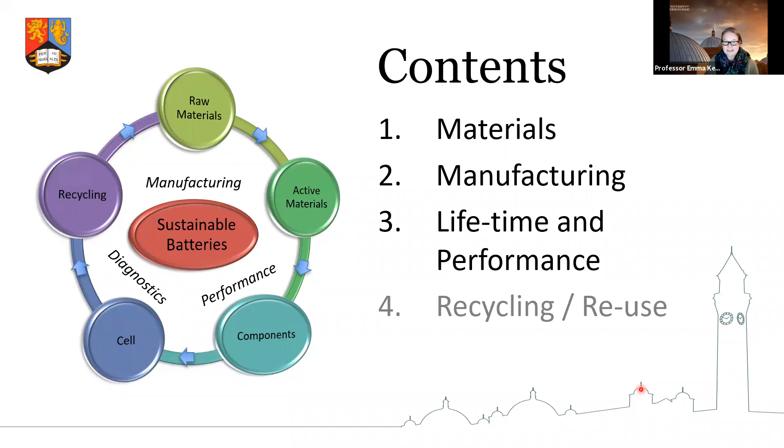And this is something that I'd like to talk to you about a little bit today in a bit of a question of sodium versus lithium. And if I get time, I'll talk about the recycling at the end. So cost and sustainability are really key for battery technologies.

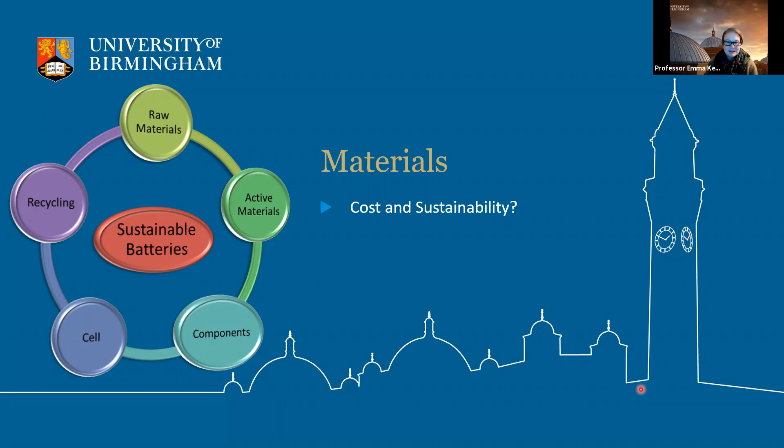And if we look at the critical materials list, this is a recent report from 2020 with an updated list of materials that are strategic or critical. And what we have here is a kind of a map of these materials with the supply risk on the left-hand side here. And at the bottom, you've got economic importance. So even if there's not a particular high supply risk, for example, you can still have a strategically important material, which is still on the critical material list.

So an example of that is this phosphate rock here. Phosphates are used very heavily in fertilizers, and so they're of extreme economic importance and just make it into the red blobs, which are the critical raw material list for 2020. If we look at this a little bit further, we can see several materials within this section that are used for lithium-ion batteries. Now, I've highlighted the phosphate, which is used in lithium iron phosphate.

Cobalt here, which has been on the critical materials list for some time. This is of strategic importance, not just for batteries, but for stainless steel as well. And there is a supply risk for this material because of where it's geographically located. The majority of the cobalt is still mined from the Democratic Republic of Congo. And so we really need to consider how we can recycle or reclaim cobalt from end of life, whether that be steel or from batteries, to be able to reuse it in the battery space.

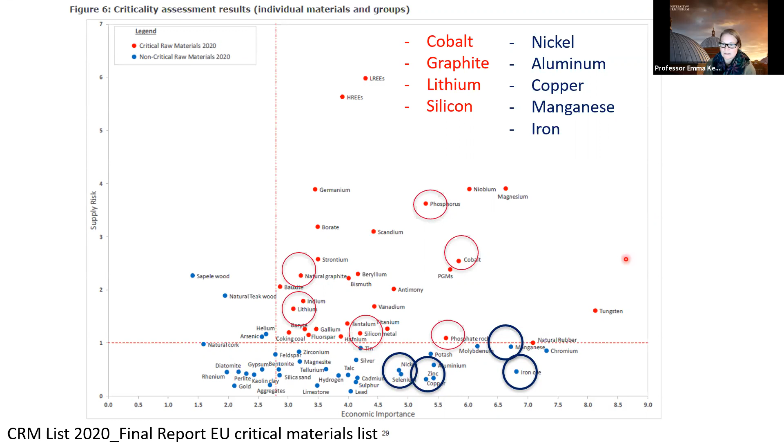So if we consider the lithium versus sodium question, whether we can substitute, for example, sodium type materials for the lithium before we consider recycling. If you look at the left-hand side, we've got some very beautiful pictures here of lithium flats and lithium mining in various parts of the world.

The abundance of lithium in the crust is 16 parts per million, and currently the recycling rate is less than 10%. The main producers are Australia, Chile, and China. Australia is mainly from rock, such as spodumene, and China, Bolivia, and Chile have large salt plains

which you can mine the lithium from. So essentially they dissolve up the lithium chloride that's beneath the ground and bring it back up to the ground and then evaporate the water off, and you end up with these little piles of salts that can then be transformed into other materials.

Interestingly, sodium is extremely abundant. I think it's the 6th most abundant material in the Earth's crust at 23,600 parts per million. It's generally not recycled because it is so abundant and quite easy to get a hold of. The main producers, again, are China, US and India. And these are some pictures here.

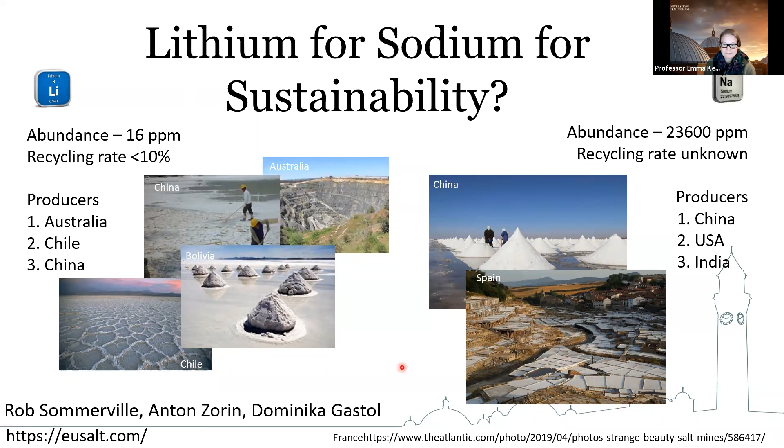So if we look at how sodium carbonate is made, which is the main material that we use for manufacturing of other types of materials, then I mentioned the solar evaporation, which is used quite heavily in Southern Europe, for example, where the water is evaporated off highly concentrated salt and you're left with these little piles of sodium chloride.

We also have rock salt, and Cheshire in the UK for many years had big rock salt mining caverns up there in the northwest. They're actually now used for storage of documents, because large salt mines keep away the moisture very well. And you can also do the similar solution mining. What I've done here is just given you an idea of the different types of mining that are done in Europe for sodium chloride.

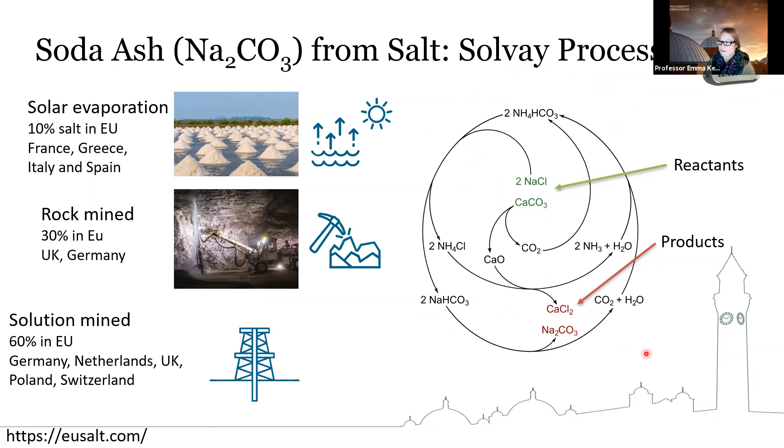Now, sodium carbonate is relatively easy to make. What you do is you add some ammonium carbonate materials and calcium carbonate, and you can form calcium chloride and sodium carbonate from this. It's called the Solvay process, and this process is still used today for the production of sodium carbonate.

Now, interestingly, lithium carbonate is also made in a similar way. So we can find these lithium chloride little piles which are created from evaporating off water from super concentrated lithium chloride pans. Now, this can take quite a long time, up to about 15 months. What then happens is we can actually form the lithium carbonate.

The interesting thing for me when I was looking into the mining and the mineral extraction was that sodium carbonate is actually used in the manufacture of lithium carbonate, and then produces sodium chloride. So here the lithium chloride is mixed, it changes the pH, you add in the sodium carbonate and the lithium carbonate drops out of solution.

On the other hand, lithium can also be mined from rock, and one of the main sources of lithium, for example, from Australia, is a rock called spodumene. This rock is first heated to form a beta spodumene, and then the lithium leached out of the rock. And again, interestingly, sodium carbonate is again used in the formation of the lithium carbonate within this system as well.

And this here just gives you a little schematic of the lithium being exchanged in the process. So it's leached out of the rock to form the lithium sulfate, which then reacts with the sodium carbonate. There are other sources of lithium, and people are now looking at mining from clay, for example.

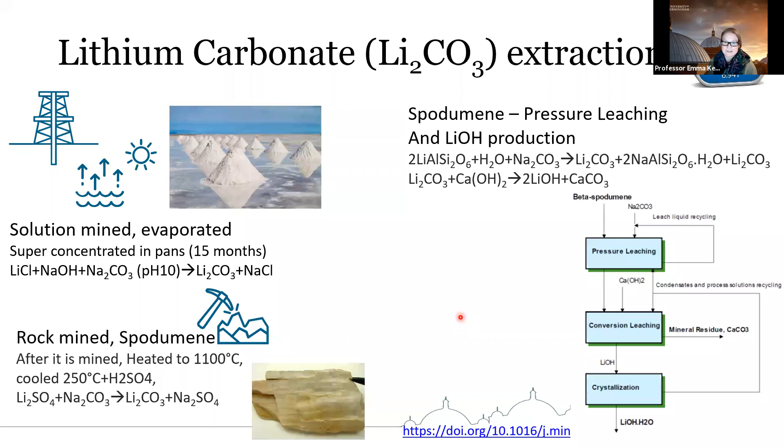In this particular route, lithium is leached again from beta spodumene, but under a hydrothermal process. It's then reacted with calcium hydroxide or lime to produce the lithium hydroxide, which is what we use for manufacturing of materials for lithium-ion cathodes in particular.

So if we compare the components of the two different types of batteries, this is just an example of the battery. We have an anode, a cathode, and an electrolyte. And the anode is on a current collector, and the cathode is on a current collector. In a lithium-ion battery, the anode is on copper, typically. The anode is typically made of graphite as well, sometimes with silicon or silicon oxide in as well. And the cathode current collector is an aluminium.

Now, in sodium-ion, you could use copper and aluminium, but for cost reasons and for safety reasons, aluminium can actually be used as the current collector. And this is because in lithium-ion, lithium actually intercalates into aluminium about 0.3 volts versus lithium, whereas sodium doesn't, so aluminium can be used in both. They have a similar electrolyte, which is LiPF6 in organic carbonates, or NaPF6 in organic carbonates.

In terms of the anode, we've got graphite here for the lithium-ion and a hard carbon here for the sodium-ion. Both of these can be made synthetically. Graphite can also be mined. So the main difference really between these two types of battery technologies is really the cathode. And here in the lithium-ion, we use nickel, cobalt, manganese layered oxide systems or lithium iron phosphate, whereas in the sodium-ion, cobalt is typically not utilised. Nickel, manganese and iron layered oxides are used.

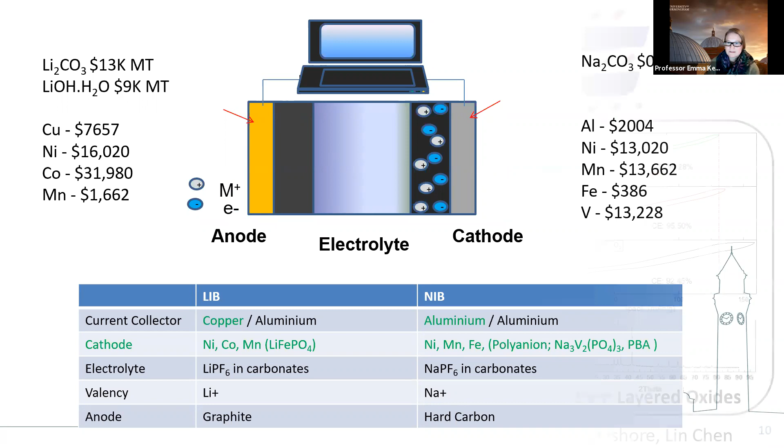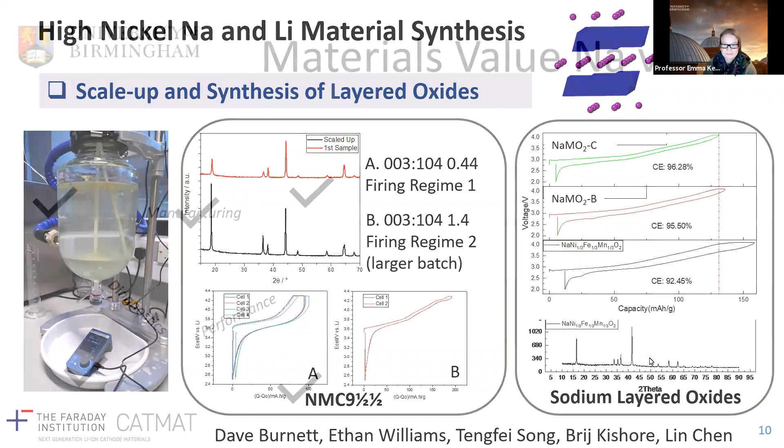Okay, so if we're considering these systems, the raw materials that we use for making sodium-ion batteries are slightly different, but we use exactly the same methods and firing temperatures and firing protocols for making the active materials. Sodium is a drop-in technology to lithium-ion, which means that all the components are manufactured in the same way with similar binders, carbon additives, and typically made by slurry cast coatings as well.

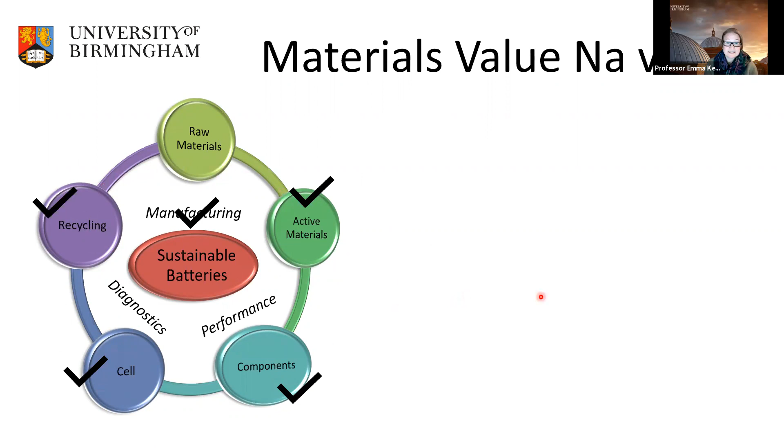And then the cells are made in the same way as lithium-ion as well, which means that if you've got similar materials which are put into components in a similar way, into a cell in a similar way, then surely the recycling will be similar to a lithium-ion battery as well. So the main aspects that we're now considering in terms of sustainability are the materials that we've discussed, but also the performance.

What we decided to look at was some of the value of the materials within the systems. And we did a quick calculation based on the metal content. I'm just going to move to the next slide, which is a little bigger. So this graph here shows you the value of the cathode systems. And here we were considering what that value would be for recycling purposes, for example.

And here I've just plotted out some standard cathode materials for lithium-ion batteries. So we've got NCA, which is nickel, cobalt, aluminium. NMC, nickel, manganese, cobalt, 111 and 811. We've got lithium iron phosphate here, lithium manganese oxide spinel. And I've also compared the value of the metal components of those materials. So the blue here is lithium, the purple at the top is cobalt, the red is nickel, and a little bit of green that you see in here is manganese.

I also decided to compare that to rock, spodumene. In spodumene, you have round about 3 weight% of lithium. And interestingly, if you then look at the NCAs or the NMC, we have 7 to 8 weight% of lithium in these systems. So actually, these cathode materials are really quite lithium rich compared to even the rock that we extract some of this lithium out of. So the value prospect for these cathodes for recycling purposes is actually quite high.

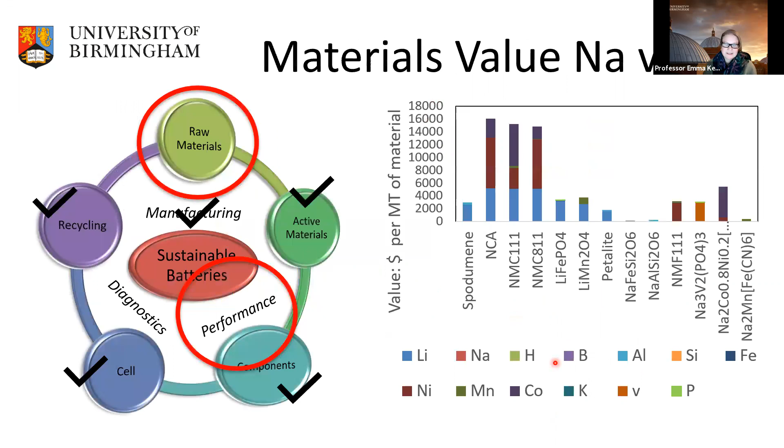And going back to this little circular economy graph here, if you can't get the value from recycling purposes, which go back into raw materials, then you need to get the value from the performance. So you need to make sure, particularly for sodium-ion, that you've got long life, high performance batteries, so that the cost per lifetime or the circular economy cost overall is similar to what you get from lithium materials which have higher value.

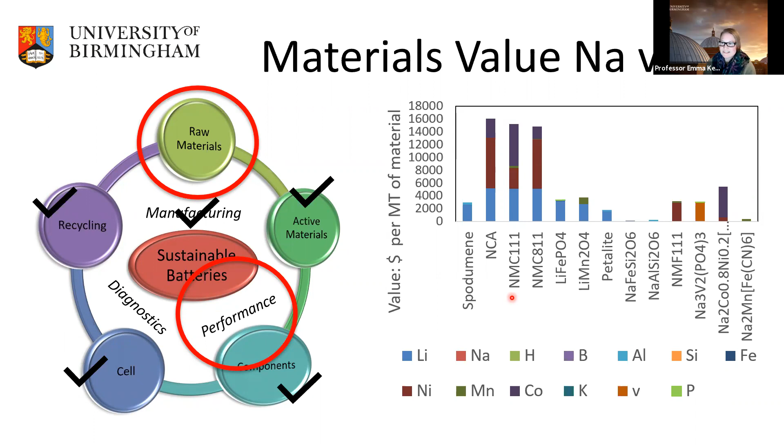And we're still not quite sure what this means. As sodium is such a new technology, an emerging technology in this space, there's a lot of questions that still need to be answered in terms of the sustainability. But what we've decided to focus on is optimizing the performance of these materials to try and improve that sustainability aspect for sodium-ion batteries.

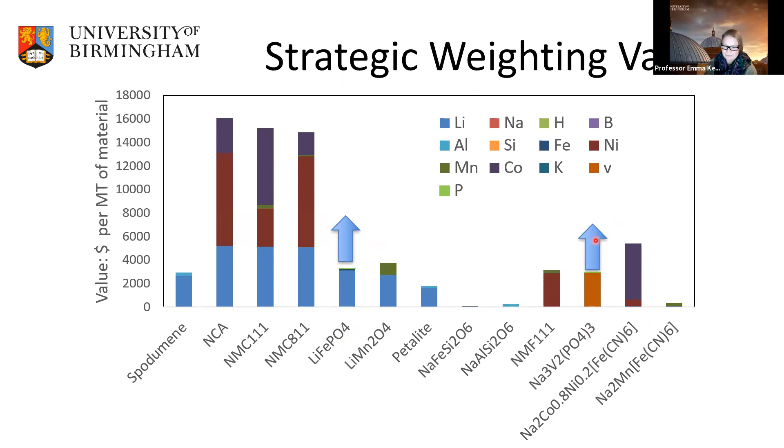If we consider the strategic weighting, which is going back to the critical materials and the critical elements on that EU list, then actually some of the phosphate could increase in value because of the criticality of the phosphates for other applications, for example.

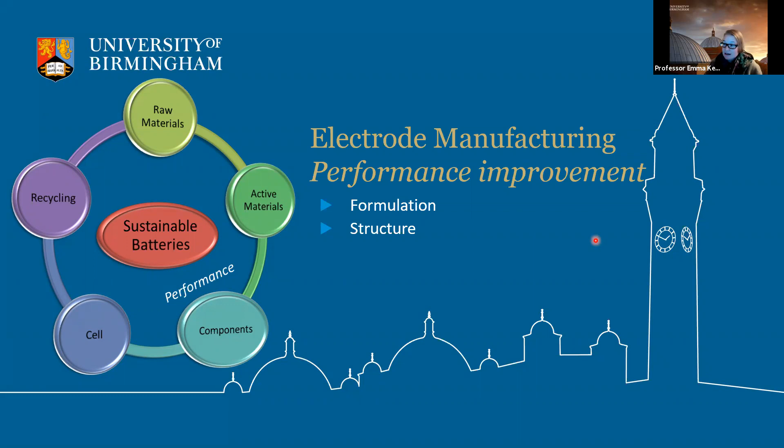Okay, so the next part of my talk, I'm going to talk more about the performance optimization of some of the electrodes that we've been developing, both for sodium-ion and lithium-ion cells. So this is some work that we've been doing on hard carbon. Hard carbon is the anode of choice for sodium-ion batteries. It has a reversible capacity of between around about 250 milliamp hours per gram, as you can see here, up to about 400, depending on the way that it's manufactured.

Magda's done an awful lot of work looking at optimizing the hard carbons for sodium-ion performance. What we've been doing is trying to optimize the electrodes for performance. Now, it's quite an interesting material because you have a sloping voltage profile here and then a flat voltage profile on the bottom. And in this sloping voltage profile, it's thought that the sodiums kind of intercalate in between turbostratic layers of graphene within the hard carbon structure.

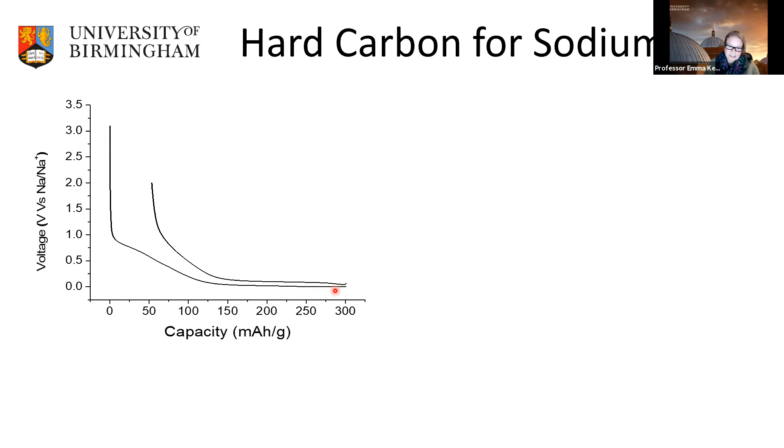And then this flat plateau here is where it's thought that we get pooling of the sodium and we get kind of metallic sodium nanoclusters forming in the vertices of where these turbostratic graphene layers interact. And there's some very nice work that was done by Melanie Britton's group at the University of Birmingham, along with Magda as well, who provided some carbons to study.

And what we did was develop a cell that could go into an MRI machine and look at the chemical shift, in operando, as you sodiated the hard carbon. And what was really interesting here is that this is kind of the electrolyte peak. You get sodiation happening, and this is where you get the intercalation between the turbostratic layers, and as you sodiate along the plateau, you get this plateauing out at about 500. So you get more and more quasi-metallic as you sodiate the hard carbon material.

Now, one of the issues that we have in hard carbon is actually it does tend to form dendrites over time, and then we can short the cells and they don't perform quite so well. And one of the very interesting things that we saw with this cell is because we developed a cell which had a hard carbon and a layered oxide cathode in it, we could actually look at the specific metallic sodium as well. And these two little graph points here at 1 and 2 actually show spectra that was captured during the sloping voltage profile bit.

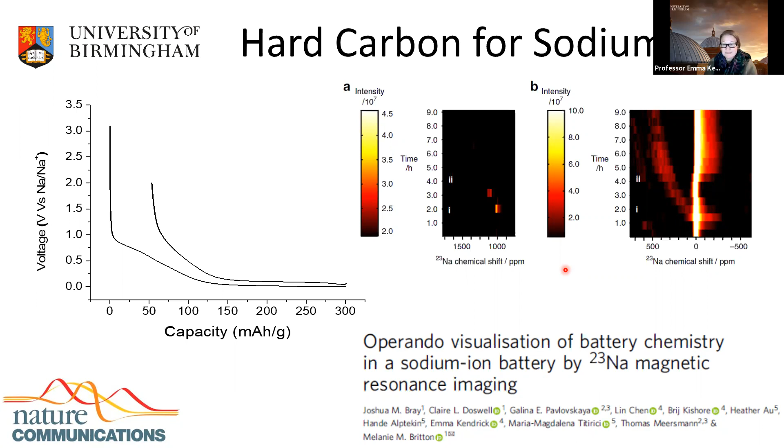And what you can see is we actually got initially sodium metal plating out on the surface, as we also got the intercalation, which then disappeared as we then went to the metallic pseudoclusters at the bottom. And this is the first time that this has actually been observed. It's been reported that it might happen from some electrochemistry data from Tarascon's group, but it's the first time that we'd actually seen during what we call the formation process, or the first cycles, this metallic sodium actually forming on the surface of the hard carbon. And this is a big risk for development of sodium-ion batteries, because it may aid dendrite growth over time.

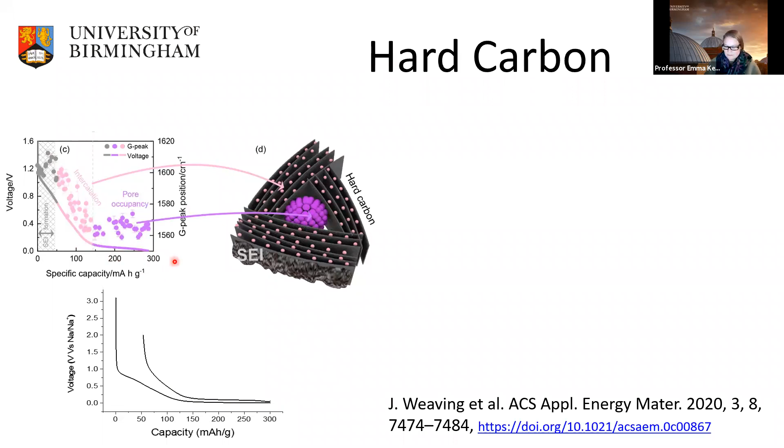We also did some work with UCL and Julia Weaving, who also showed some really nice work which confirmed what we saw from the MRI from Raman, where we got an SEI formation at the beginning, got intercalation in the sloping voltage profile, and then this pore occupancy of these pseudometallic sodium at the bottom plateau. And as I was saying, one of the biggest issues that we have for long-term cycling in some of these hard carbon materials is this sodium plating.

And what we know from electrodes is that if we can further optimise both the electronic and the ionic conductivity, we should be able to reduce some of the extra processes that go on and improve rate capabilities and intercalation properties. So what we decided to do was to try and promote ionic diffusion within the electrodes.

So we added an electronically insulating material, zeolite, into the electrode structure. And what we thought this would do would be to keep electrolyte in little electrolyte wells, so that electrolyte was present to be able to enter the hard carbon, and to try and promote ionic diffusion throughout the electrode itself.

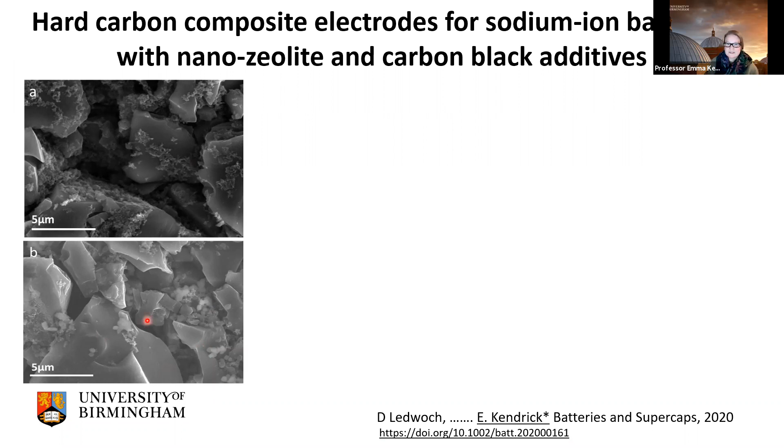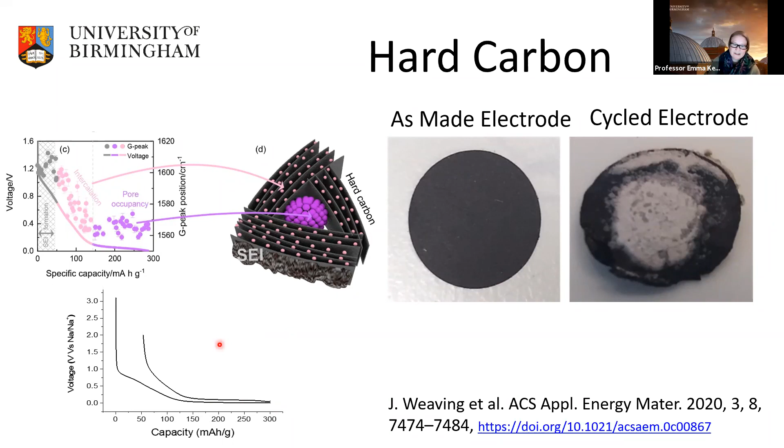And this is mainly because if you go back up to this graph here, this flat plateau has very, very slow diffusion properties as we're creating these little nanoclusters of sodium. So we thought we'd try and help it somehow by improving the electrode properties. And to our great surprise, it actually worked.

And this was some work that we were doing initially at Sharp. It's work done by Daniela Ledwoch, who then did a PhD at UCL as well, to try and create or promote high power capability within our electrodes. And with all the high power work that we did, we got this plating.

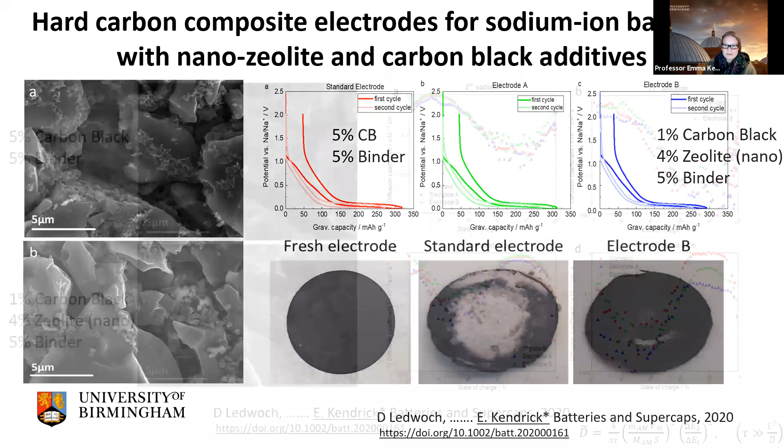But by putting in an insulator, which is kind of counterintuitive, we were able to actually reduce this plating quite significantly. And so initially we thought, oh, that's very exciting. This must be because we've actually created a greater 3D network for this ionic diffusion throughout the electrode. And we did quite a lot of work looking at the specifics of the diffusion.

And these are some diffusion coefficient calculations that we got from galvanostatic intermittent titration techniques, GITT. And you can see again here that this higher diffusion coefficient is the sloping voltage profile, and this very low diffusion, 2 orders of magnitude lower, happens on that low plateau region.

And when you cycle it as a standard electrode, the diffusion coefficient reduces quite dramatically as you cycle it, as you can see here. And we thought this was because we were blocking the pores over time, and electrolyte wasn't getting to where it needed to be.

If we put a small amount of this zeolite in and substituted it for the carbon black, although our overall resistance increased in our electrode, and these little white patches that you can see here are the nanozeolite that we've added, these bits here are the carbon black, we found that we could actually improve the diffusion coefficient over time compared to what we had.

And then we looked at it in a little more detail, and this was some nice cross-sectional work done by Dominika from our group. And what she showed is that actually during cycling, we blocked all the pores of our electrode from the SEI growth. So essentially the SEI is not stable in this material, and all these white bits that you see in between the hard carbon are actually the interface layer that's grown between the hard carbon particles.

With a zeolite additive, we still had small pores in our electrode. So yes, we'd improved the porosity of the electrode over time, but not in the way we originally thought it was working. And we ended up doing more work, this time using it as an electrolyte additive, to show that what was actually happening is that we were stabilizing the interface layers over time.

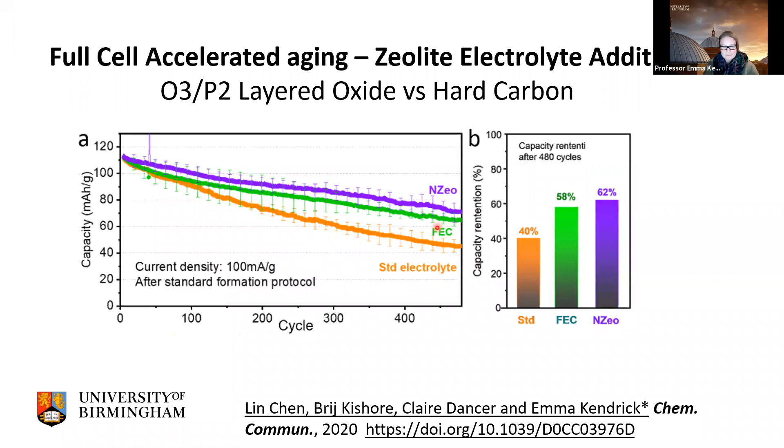We also compared it to what is normally added to a standard electrolyte for sodium ion, which is FEC. And it's thought that the fluorine content in the FEC helps to form a stable interface layer. And from some work that we did, we actually showed this to be counter to what we observed.

So in our pristine hard carbon, on the surface of our hard carbon after cycling, we started to see a small growth in sodium fluoride over time. As you would expect with the FEC additive, we had quite a lot of sodium fluoride on the surface, which started to decrease as you cycled it, indicating that actually this interface was still not stable over time.

And then under SEM, what you can see is these little square patches which are over the surface of the hard carbon. And this is actually sodium fluoride crystallites forming on the surface of the hard carbon, whereas in the nanozeolite, you didn't get any. And what we found was that the nanozeolite was actually mopping up things like HF and water.

The water reacts with the NaPF6 salt to form HF, which then forms the sodium fluoride. And by putting the zeolite in, we actually stabilized the interface by removing parasitic reactions from the electrolyte decomposition. And that's what stabilized it.

So going back to what was quite a lot of work initially to try and promote high power electrodes for sodium ion, we actually found that the zeolite additive did not do what we thought, but actually stabilized the SEI layer instead. And we proved this by adding it to the electrolyte also.

So the next bit that I wanted to talk about is also moving into electrode design, but talking about some structured electrodes that we've been working on again for some time. If you look on the left-hand side here, this is a typical slurry cast coating, which is one of the first coatings that we did on our reel-to-reel at Birmingham. It is quite difficult to obtain thick electrodes or high coat weight electrodes for high energy.

This gives you an example of one of the performances of those materials. This is a graphite material. Its theoretical capacity is 372. And from this particular thick electrode, we're aiming for about 3.3 milliamp hours per centimeter squared coating here. You can see we get quite a fast fade rate. And without an awful lot of optimization, this is what we get for the high coat weight electrodes.

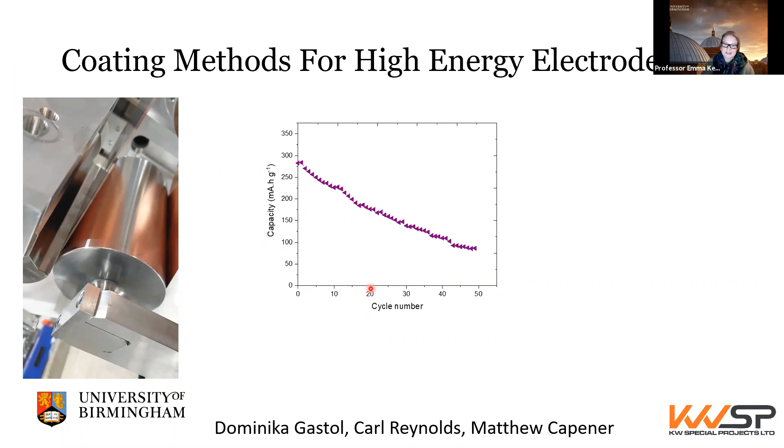And this is in part because we haven't optimized the electronic conductivity and we haven't optimized the ionic conductivity or the porosity or tortuosity of our system. And so what we decided to do was look at different methods of manufacturing electrodes. And this is some work that we did as part of an Innovate UK project with KWSP and also Matthew Capener from University of Warwick.

What we were doing was using a syringe dispenser to actually make patterned electrodes. So we could actually syringe out, almost like 3D print, our electrodes with very little waste in a structured design. And this is one example of a design where we could create little valleys and troughs in our electrode as we coated it, at the same coat weights that we had for our slurry cast coating on our reel-to-reel as well.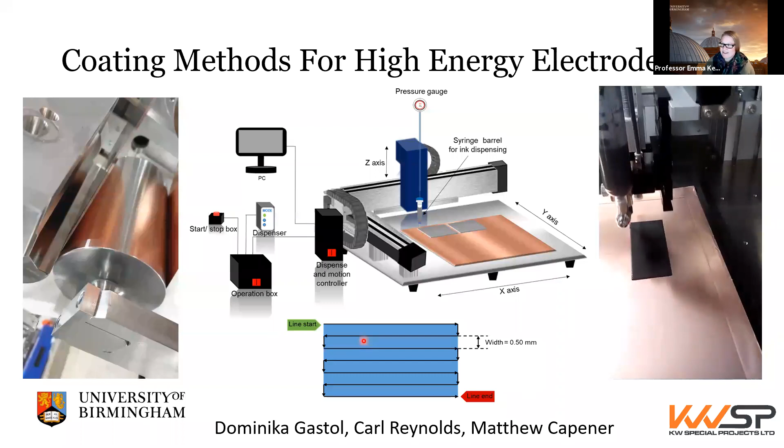And this is an example of how the slurry dispenser works. So we have to optimize our ink to be able to extrude out of this machine, and then we can print different types of designs. This particular electrode that we're printing at the moment is actually a homogeneous cast, almost like a homogeneous electrode without any ridges in it. But we could also modify the inks so that we could create different slumping effects to either create these large flat electrodes here or these more structured electrodes that you see at the right hand side.

This is a very similar technique to what's used for things like face creams. A secondary solvent is added to change thixotropy and the feel of your cream as you make it. And so we're using a very similar method here to change the rheological properties and the slumping to make sure that we can actually get defined deposition as we print our electrodes.

And this happens by a capillary mechanism. So what happens is you put your secondary solvent in and it forms these little capillary joins between the particles, changing the thixotropy and also the viscosity of your ink quite considerably, even with tiny amounts of additive. And this was really important to make sure that we could actually extrude and print the ink through the little nozzles that you saw on that syringe.

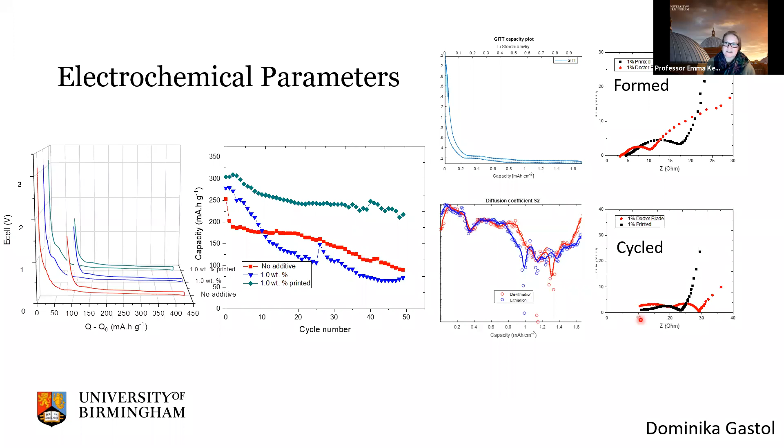So finally, one of the things I wanted to mention was that we can now analyze these electrode properties for some of their parameters. And we're looking at not only cycle life, which we can improve here, as you can see from the printed electrodes, but also we can look at the diffusion properties and some of the kinetics and the exchange current densities, which we can extract from some of the EIS data. And this data is quite important because we can use that in optimizing the performance properties of our electrodes.

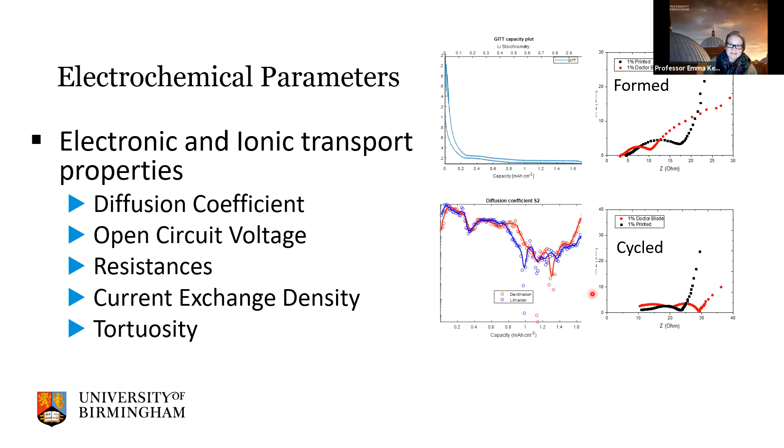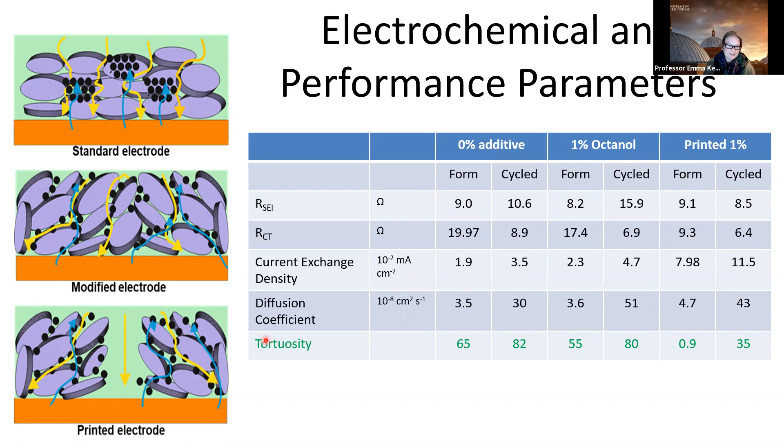And this is something that we're also using for input into multi-physics models along with Imperial as well. So we're providing some of those parameters to go into those multi-physics models. So here we just summarize that. We can modify the tortuosity and the properties by changing the additives that go into the electrode, and also by changing the structures of the electrode to optimize transport properties of electrons and ions. And the big thing to notice here is just our tortuosity is very low in the printed electrodes because we've got some gaps that our electrolyte can go through to be able to then get to the electrodes.

Okay, so just in summary, sustainability is more than just materials. It's about how you make the materials, manufacturing, and also the performance. And from what we've noted, actually, it's the performance that we probably need to work on most for some of the sodium-ion work, because it's not yet clear whether we can recycle sodium-ion batteries, because the value of the components is so much lower than it is for the equivalent in lithium-ion.

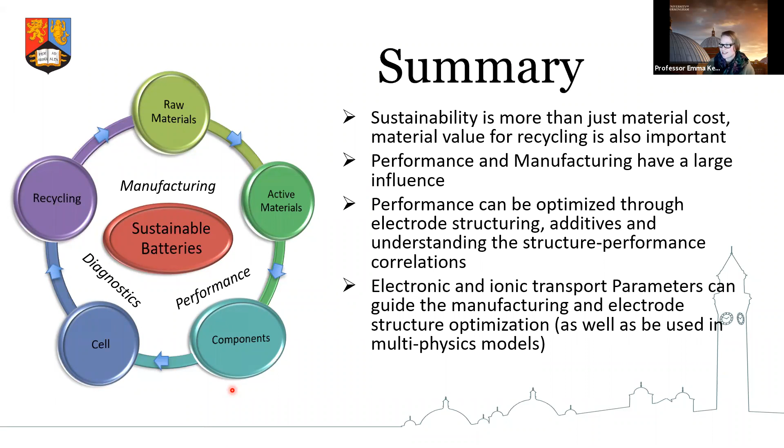And so by optimizing the performance properties by looking at structured electrodes or additives and understanding the structure-performance correlations, we can extract out the fundamentals of the thermodynamics and the kinetics, or the electronic and ion transport properties, which guides not only the manufacturing, but can also be used in multi-physics models to understand and predict cell life as well, or cell performance.

So the first question is from Kunal, and he asks, how do you ensure uniform electrode thicknesses when depositing the slurry through the syringe? I see, that's interesting. We don't get uniform electrode thicknesses. What we're actually trying to do, I wonder if I can go back, is to optimize channels within the electrode to try and promote electrolyte transport, particularly for high power. But in this case, actually, what it promoted was cycle life rather than power.

And that's because I don't think the density of the electrodes was high enough, which meant we didn't have good enough electron transport throughout the layers. Now, I think it's interesting because we can form structured electrodes like this, and we can get improved performance properties in a half cell using a lithium metal counter electrode.

But when we come to use it in a full cell, for example, then I think that's a really quite interesting question. Where does the lithium go? What is the current density at different points? And do we end up then having a mismatch between our anode and cathode because of this effect? So I think that's a really good kind of question and something that we haven't quite got around to answering yet. Thank you.

I don't see more questions, so please, if you do have questions, put them in the Q&A section for Emma. Oh, here, there's another one from James. Do you think that similar optimization of structure could be applicable to other anode materials for sodium-ion batteries, such as alloys?

So following on the zeolite, Milo is asking if the proposed mechanism of the zeolite addition is that it acts as an in situ water scavenger, avoiding unwanted hydrolysis reaction over time. And then he further asks, does this mean that the benefit has a finite lifetime until the zeolite is saturated? Yeah, I think it probably does matter. Again, just because this as well, I mean, degradation happens, you can't stop it.

Great. I see no more. Oh no, there's one more question on what I was about to ask, but I guess I'll have to ask from the audience first.

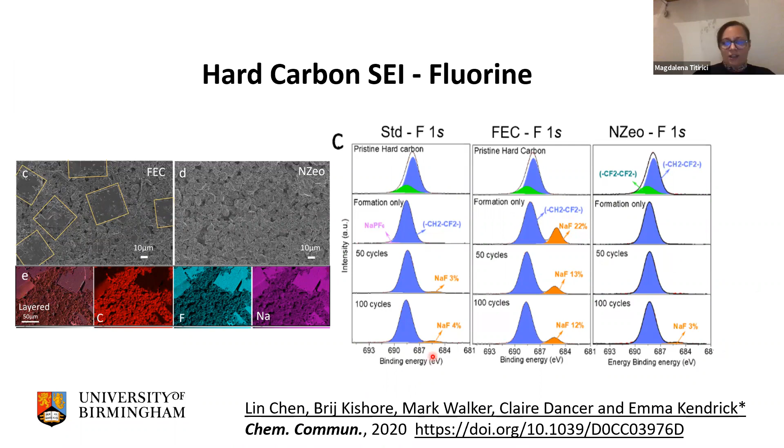With the 1-octanol, what was the difference in the orientation of the graphite flakes measured after calendaring? Okay, so, calendaring. So yes, so we didn't calendar it, and I can tell you why we didn't. Well, we did calendar some and we didn't calendar some of the others. What we were looking at was to see if we could change the morphology and the alignment by adding this secondary solvent, and we could.

The problem with calendaring is that, as I think this is what Jack is alluding to, you squash it and things align back together again. So we still have to find some way of being able to improve the electronic conductivity, whether that's through calendaring or through another method, and reducing the porosity to get it to be a working electrode. I think this was very much kind of a proof of principle to show that we could change the microstructure by using different secondary solvents and quantities of secondary solvents.

But there's still a way to go, I think, before we understand it well enough for it to be a production style electrode. Because without a doubt, we have porosities in this of round about 50–60%, which is far too high. It needs to be down to 25–30% for a graphite electrode, really. And the calendaring kind of destroys the microstructure, and it doesn't make such a nice kind of picture. So yes, we'd still need to find some ways of improving that.

Okay. And maybe one last question, because we kind of need to finish. So we have 1 minute. You have to answer very quickly, Emma.

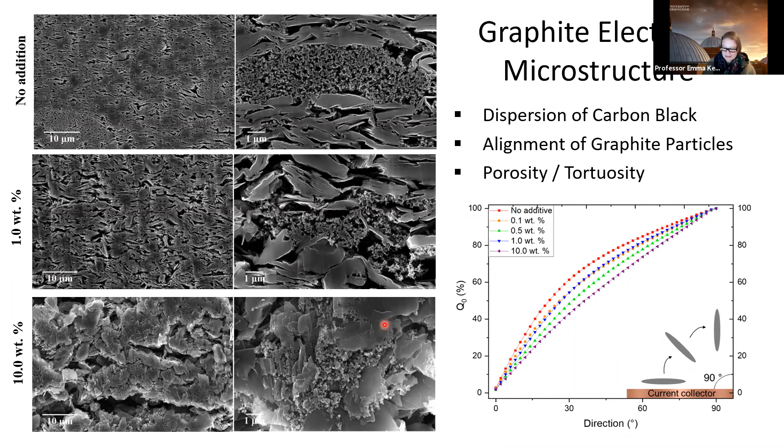From Harry: isn't it more than just cost of material that drives how recycled they are? For example, paper is cheap and gets lots recycled. I guess it's dependent on the cost of recycling versus cost of materials. Yeah, but it's also on the ability to deconstruct and reclaim the material. So yes, absolutely. Cost is just one of the things, and we've also been doing quite a lot of work on recycling to look at improving the cost.

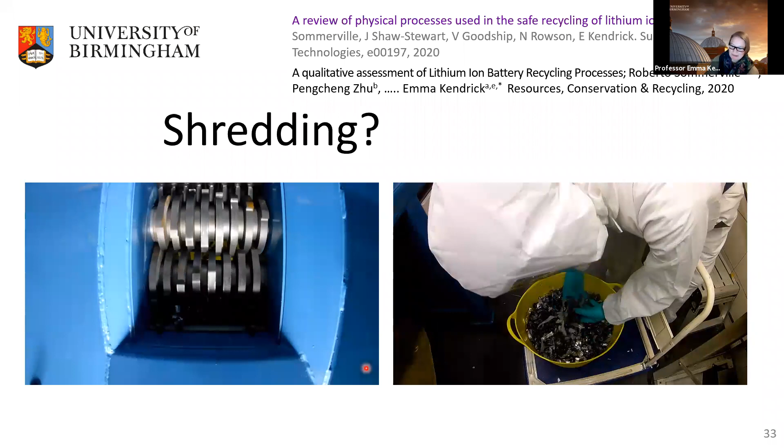So we have a shredder, and you can see the shredded material that's coming out the shredder there. We then have to separate that out to create purer materials waste streams that then need reprocessing as well. And one of the other things we've been looking at is disassembly, so whether that would create purer materials waste streams that are more easily processed compared to the shredding. And again, I don't have an answer for you. It's still work in progress, but I think at the moment, what we're finding is the shredded materials take quite a lot to purify compared to what we do from a disassembly process.

But from a disassembly process, it's quite difficult to automate the disassembly because everything is a different shape, different size, got tabs in different positions and module sizes. Nothing is built to a standard. So nothing is designed for disassembly or designed for taking apart. And there's still quite a lot to do there.